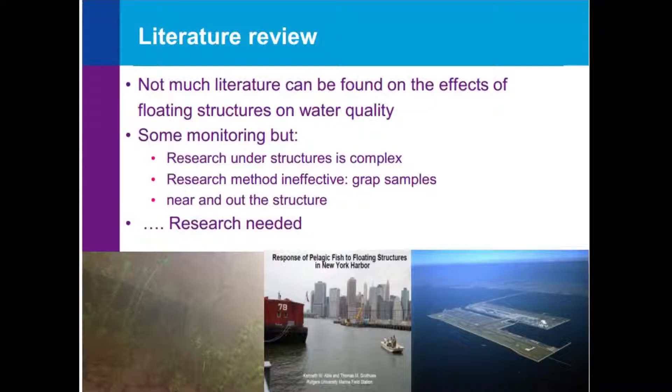Some of the monitoring show, well, not effects, they're grab samples as well, and if you know something about water quality, it's very dynamic day and night, for example, but on locations as well, so that makes it very complex to do very good measurements on this. So, not a lot of literature is found, so more research needed. That's basically why we conducted this research.

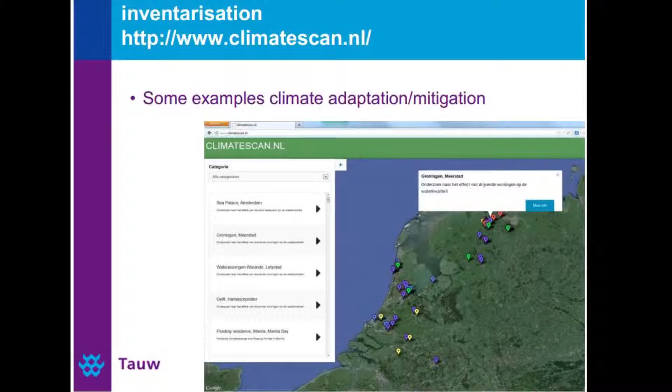So, well, I told you about inventarization. This is a website, it's called ClimateScan. There are a lot of mitigation and adaptation measures on here from the Netherlands. And when we filter, we have these research locations on floating homes, which you can see here. In the Netherlands, there are about 30 locations with floating structures, houses, but other structures as well, which I will show you.

And on this website, you can click on the locations, and it will provide you a lot of information on the structure itself and on the knowledge, articles and papers being written, and some videos, which I will show you later on as well. This is a Dutch site. If you zoom out, there is actually some information on Manila, for example, from the Philippines, some workshop that we did 2 years ago. So it's really meant as a knowledge exchange tool.

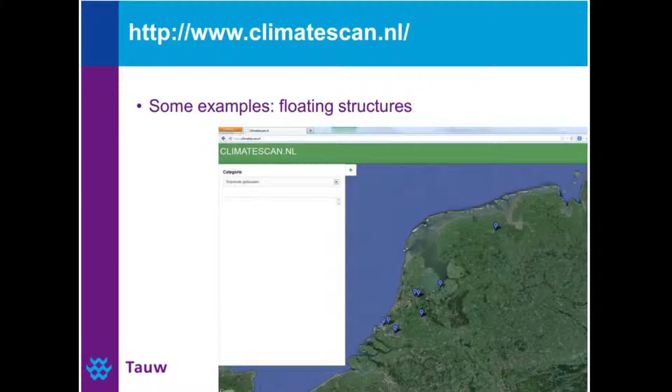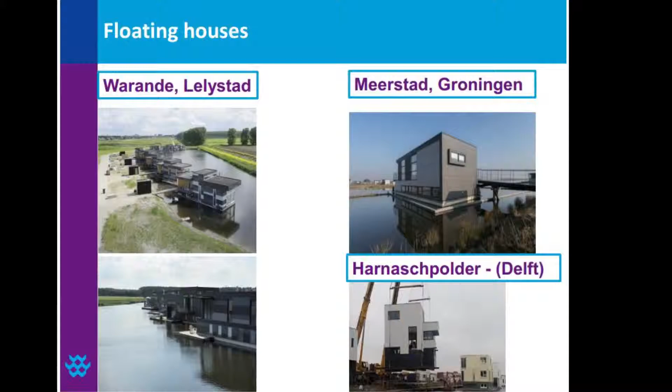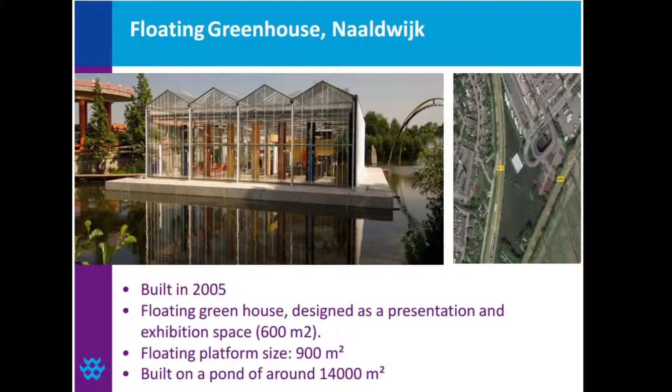So, well, some of these examples, floating houses, probably you've seen some here. There's some in Groningen, Lelystad and Delft that we've done some research on. But besides houses, there is a floating greenhouse, for example, in Naaldwijk, built in 2005. There are some other structures like living boats, quite huge in the Netherlands. Groningen is one of the cities that has a lot of living boats, as do Amsterdam and Utrecht, for example.

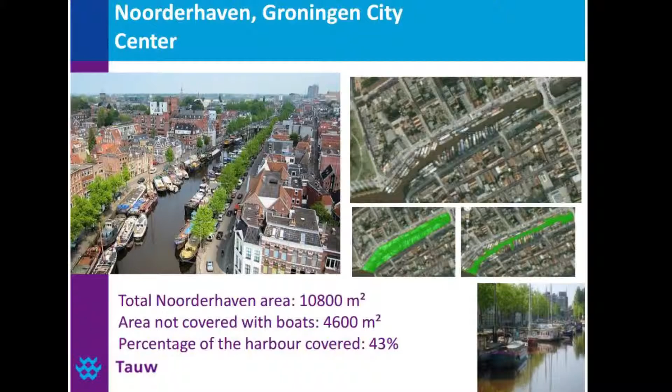...who are in this study as well. As you can see here, this is Noorderhaven. If there should be an effect of floating structures on the water, this is it; in some sections it's even like 2/3 of the surface being covered by floating houses. In this case, not even connected to the sewer, so you could expect some water quality effects. So it's quite an interesting location that we did research on as well.

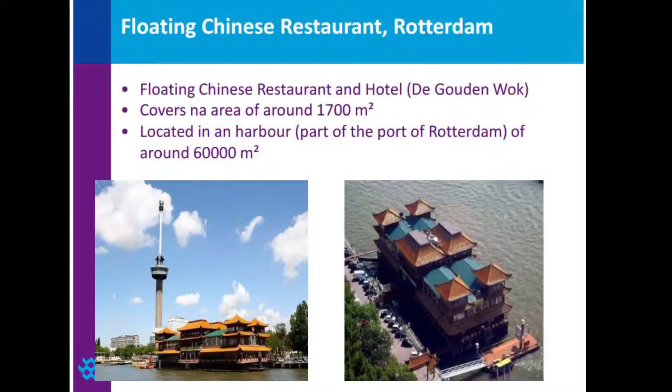A floating Chinese restaurant in Rotterdam, for example, you might have seen it. You might think that Rotterdam has it all. It has this conference, it has a floating Chinese, it has the floating pavilion. But in Amsterdam there's a floating Chinese restaurant as well, and it was first. It might reveal where I come from, so to promote Amsterdam a bit as well. So that's one of the structures as well.

Anyway, water quality measurements. Not a lot of literature, so we should do more measurements on this. But as mentioned before, it's quite hard to get under structures, and it's very dangerous for divers to go under there and take measurements. So we had to do some innovation. One of the innovations we put in this project is using drones, which is much safer, and we can locate it under the structures, and well, it's more fun.

What it measures is nitrate, ammonium, and oxygen, one of the most important things we have to rate the water quality. Temperature, of course, under the structure and beneath. Pressure, which basically means how deep the drone is under the structure, and conductivity as a parameter of water quality. We also put a diving light on it, because it's quite dark underneath, and there's a camera on it as well, so you can see a lot of eco life if there is any.

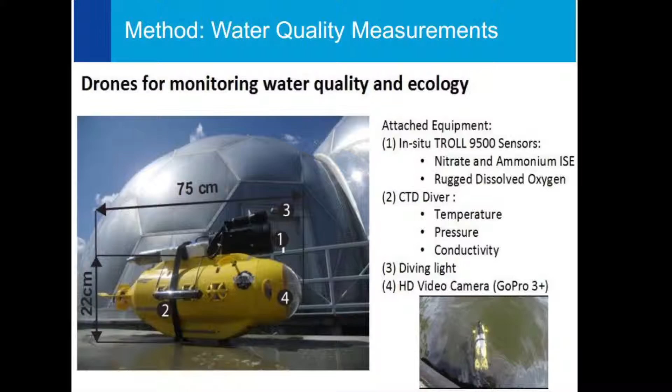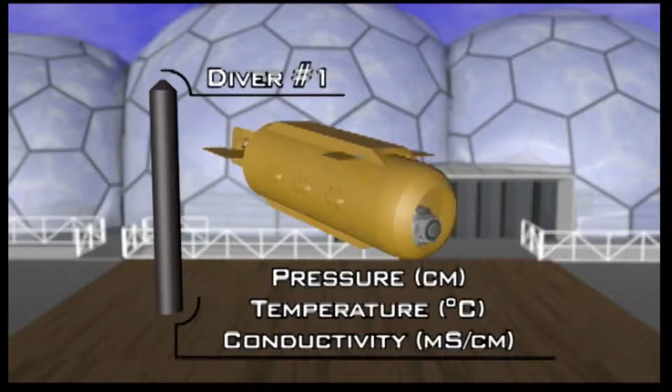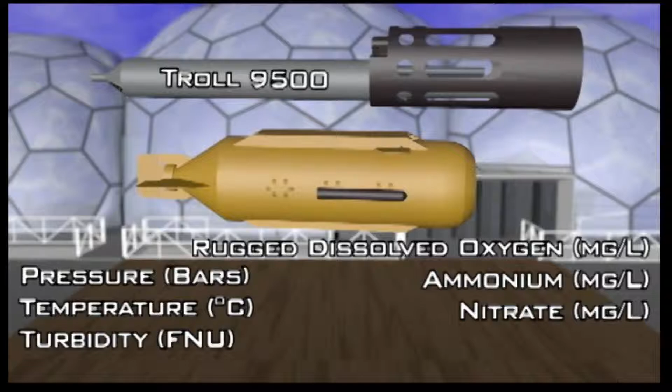I could talk a lot on this, but I'll just show you a video of the drone and some of the locations we have been working on. This is the drone and some of the sensors we put on it. This is conductivity, pressure and temperature, ammonium and nitrate, and oxygen, of course, which is the biggest parameter. So, an impression of the locations. Not really stable, but it's an artist impression. Danish Dogma, if you will, not from Trier.

These are some of the structures, and of special interest are the bigger structures, because we could expect a bigger impact on the water quality. This is Groningen, for example. It was on the news last weekend. Also video images. As I said, there's a GoPro camera on it, which shows the life and the state after a couple of years of implementation. A green guy and a red guy, blue and black.

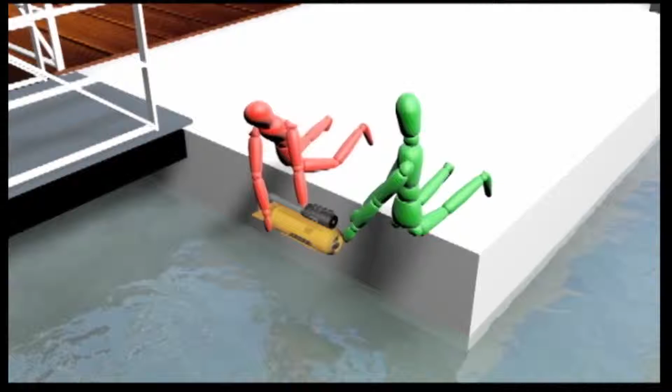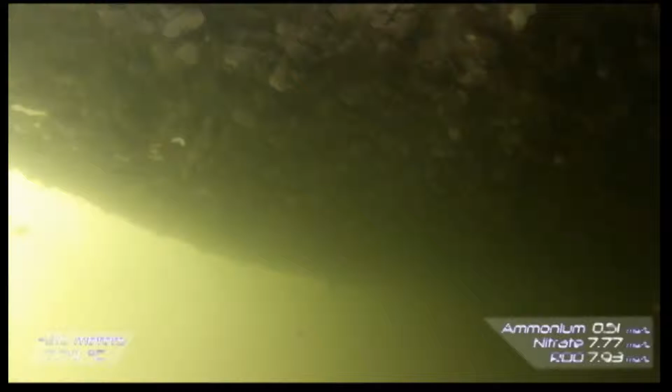The drone goes into the water, and basically we sink it down to the level of the floating house and try to get it underneath. What you can see here are some of the values running with the experiments. And here is kind of eco life, mussels, if you will. You see some fish as well. So it's quite interesting to get under the structures and see all this life. We should really make a documentary on this.

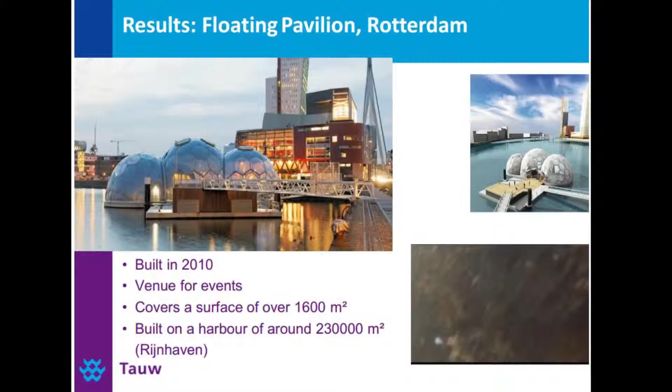Okay. So, back to some of the results, because the pictures are nice, but we need graphs, and we need to prove what the difference is. This is the floating pavilion, you've already seen it. We saw some footage on this as well.

Some graphs, I'm not going to go in detail, but basically what it does is that we go from the surface, so beneath the floating structure, we go underneath and we see how the values differ. Basically, it's quite hard because you see a lot of values, but of course, if you know something about oxygen levels in the water, it decreases by depth. So you should really compare points on the same depth, on the same oxygen level, for example, or ammonia. So basically what it says, there's not a lot of difference between it on this structure.

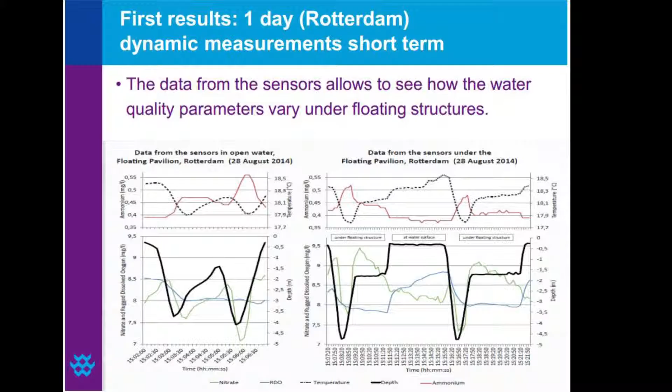And we can go with the drone a couple of meters under the structure, but that's basically what it allows us to see in this case. So there's a poster hanging on the wall, so if you want to get in detail on this, we could explain some more. The one I saw there, that's just with the drone, so it's very short, it's just momentum, so to say. What we did as well is put sensors on there for a couple of days. And of course you have day and night variations, so you should see some difference.

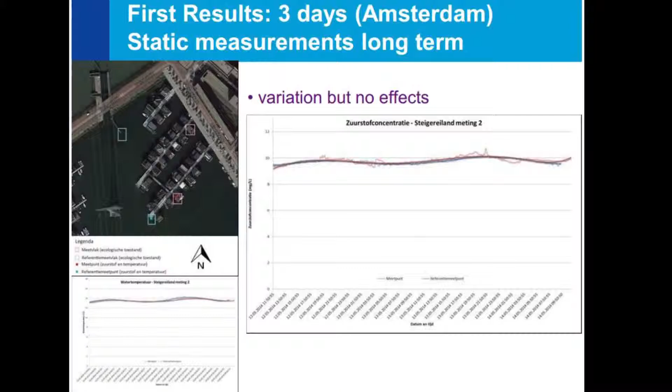In this case, the oxygen level in Amsterdam, so what you do, you place some of the sensors underneath the floating homes in this case, and on some reference points. What you can see here is basically no difference at all, variation, no effects. But it's not on every location, of course. So this is in Utrecht. Again, static measurements for 3 days. For long term, what you can see is some difference here, but not largely. As you can see, the scale is just 1 milligram per liter in this case, and that follows it basically.

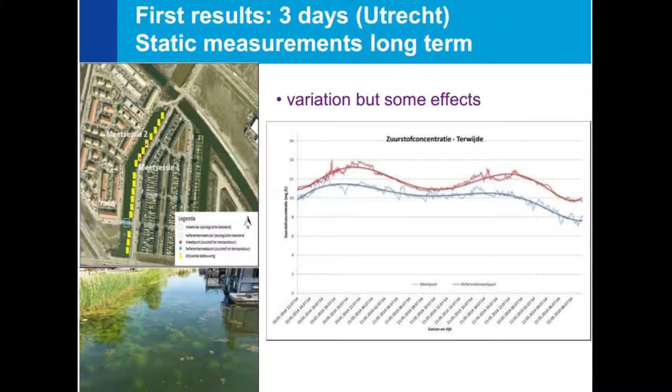In most of the locations, especially in Utrecht, if you go to Climate Scan, you see in the video a lot of movement of water underneath the structure. So it would be mostly logical that the water quality moves as well as ecology. And here, the last example, Naaldwijk, where you can see more variation in this case. But basically, if we look at the average, no significant effects would be the scientific term, so to say. And here are the sensors that we have been using.

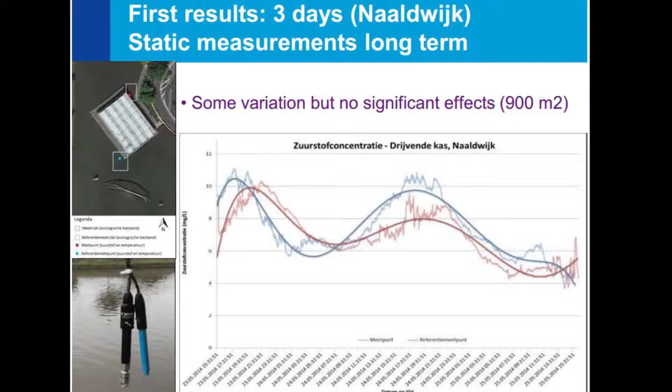So, the first results, to conclude from this research, and we're going to go on, of course. These are some of the data we have been presenting, and we're going to make this into a scientific report on all locations, which we need for a representative view on this. But what we see now, small-scale floating projects like the houses have not a lot of significant influence on the water quality. Of course, the next step will be going to bigger structures and see if we have some implications or impact on that.

Two, I think quite interesting from this research is the footage we already have of the life captured on the video camera, which is of course a very good indicator of quality. And showing this to a lot of builders and water authorities is already evidence that there is not a lot going on basically on small structures, so to say. Of course, we would like to transfer this knowledge to the online tool, as I said, the Climate Scan, to get stakeholders informed on the potential environmental impact of floating developments and get that message across.

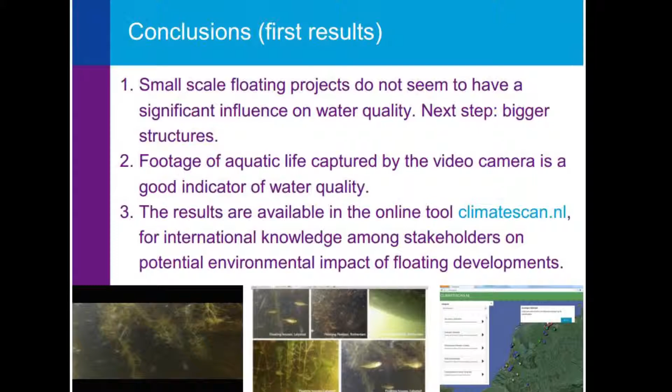So there is room for 1 or 2 questions about the drones, the water quality. Yes? Yeah, thank you very much. I think the water quality beneath a floating entity depends upon the material. So if it is timber or some kind of steel, that may invite some kind of algae and fish, while plastic may be very different. So do you have any comparison of materials, the difference?

Yes, very good question. Of course, there are a lot of indicators or parameters that influence the water quality, and one of them is material. What we do with fact sheets on the inventarization is to go by which material is it, when was it built; of course, the time being in use is a very important one. As other things, as the water. Is it salt water, is it fresh water, is it a big water, how much is the surface? So now we have only some of the projects and results, but we're going to relate it to a lot of impact parameters, and material is, of course, one of them.